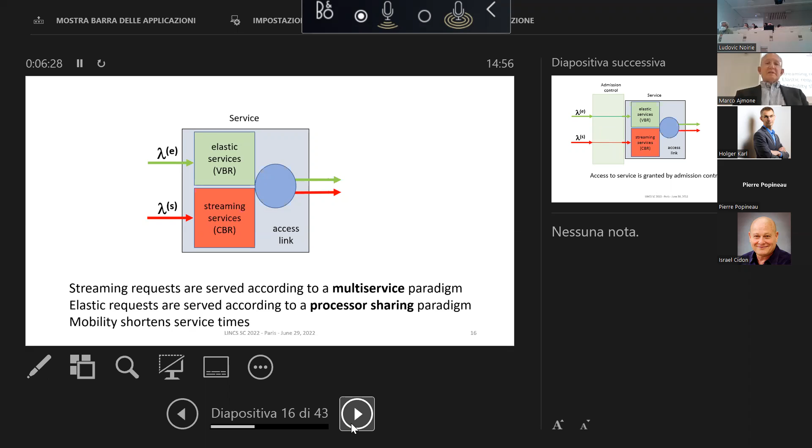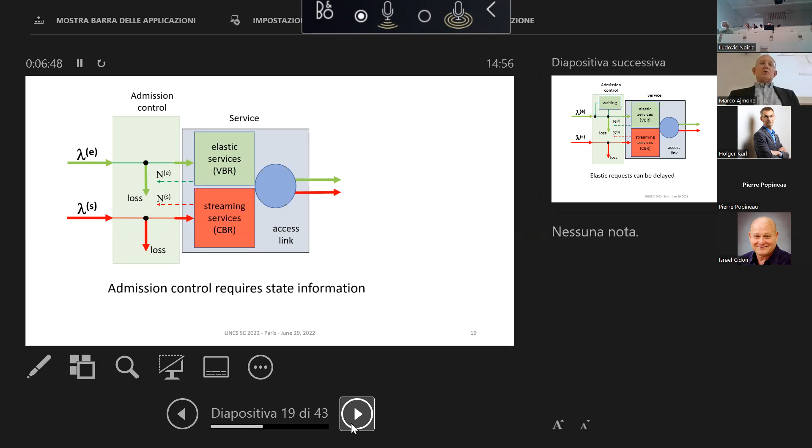Access to service is granted by admission control. Admission control may generate losses. Losses are dependent on what is the state of the system. So we have an admission control which is based on state information. For streaming, I cannot do anything except rejecting the request. For elastic, due to the fact that the service is indeed elastic, if I don't have resources, I can just delay the request. The service policy is Erlang B type for streaming. There is no queuing, and it is processor sharing for elastic, where queuing is induced by admission control.

Now, before I show you some results, let me mention that this paradigm has been investigated before in the literature. And you find in the literature several papers that state that this kind of model is essentially intractable because there is no product form between the behavior of streaming and elastic. The two types of services are dependent on each other. You cannot just solve for streaming and then apply a solution for elastic conditional on the distribution of streaming. Product form does not apply. There is a fairly complex interaction. And so in the literature, what you find are approximations and bounds. This is what exists in the literature.

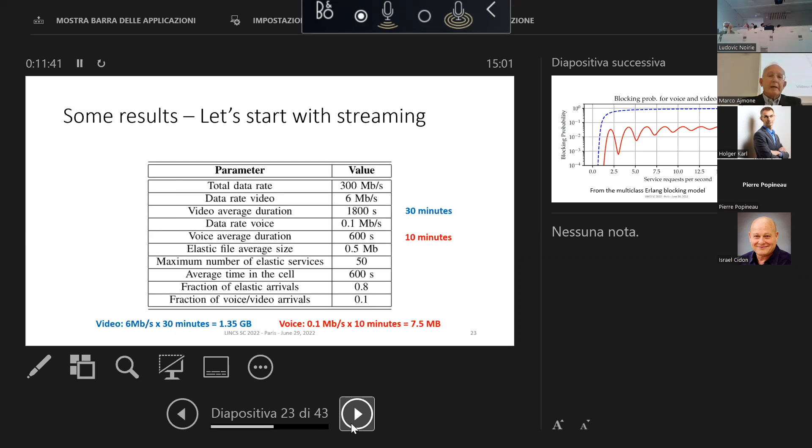Now, you solve for streaming, which is very, very easy. I mean, this is just a multi-class Erlang B formula. And what you get is strange. Actually, when they first came to me with these results, I said, come on, that's not possible. That's wrong. But this is what you get. And if you look at what happens for video, you see something which is very familiar.

So you see a monotonically increasing loss probability for growing request service. In the horizontal axis, we have the service request per second, and in the vertical axis, we have the blocking probability. What is unusual, or at least was surprising to me, was to see that the voice blocking probability is oscillating. How can it be oscillating like this?

And we spent some time trying to figure out why this happens. And this is probably one of the interesting things that we found out. This is happening because of the large difference in resource consumption that you have between video and audio. You see, these are the stationary probability of 46, 47, up to 50 video services. And what you see is that 50 simultaneous video services consume the entire base station bandwidth.

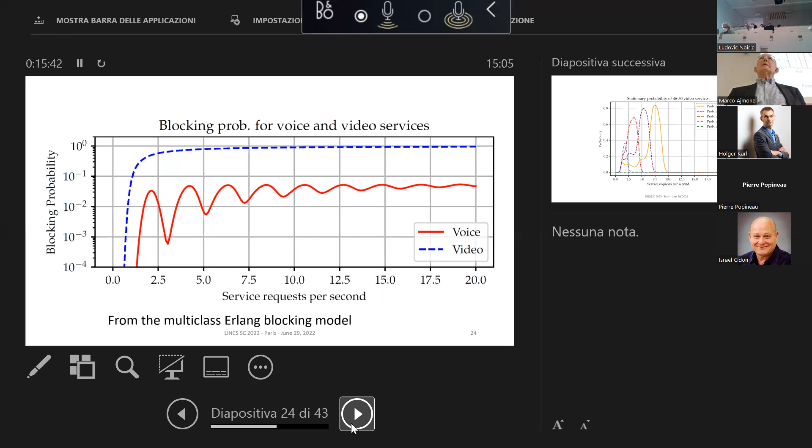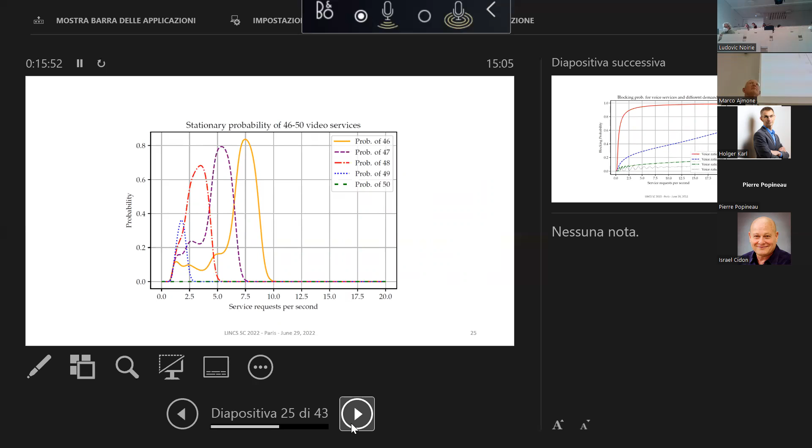And after trying whatever we could try, we finally couldn't escape trying to activate our brains and trying to figure out why this was happening. And these probabilities, I think, are explaining fairly well what is happening in your system. But as I said, up to here is just more or less of a curiosity.

The fact that this is generated by the difference between the resource requirement of audio and video is also explained here, because if you keep exactly the same overall occupation for one voice and one video call, and you're just dividing it differently between video and audio, what happens is that if you have a ratio 1 between the occupation, of course, the two curves are exactly the same.

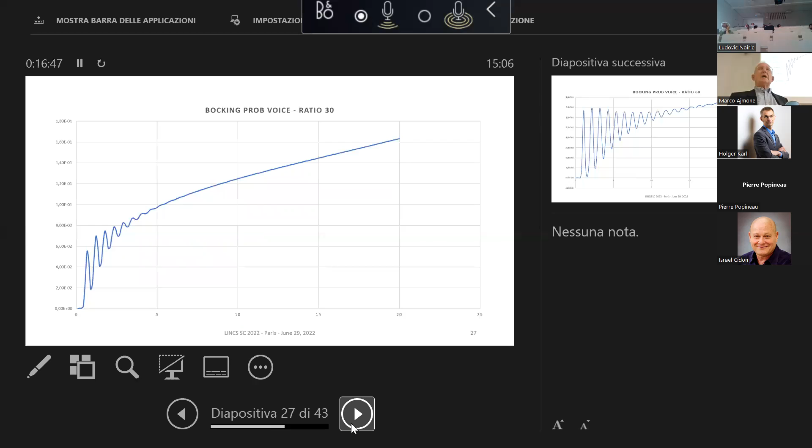If you have a ratio 10, you don't see anything. If you have a ratio 30 or 60, then you start seeing oscillations. This is what happens with ratio 30. This is what happens with ratio 60.

And here you understand why I was pointing out before that I am lowish on video and highish on voice, because I am not exaggerating the ratio. So this is something which is likely to happen in practice with the numbers that we are using today for video and audio.

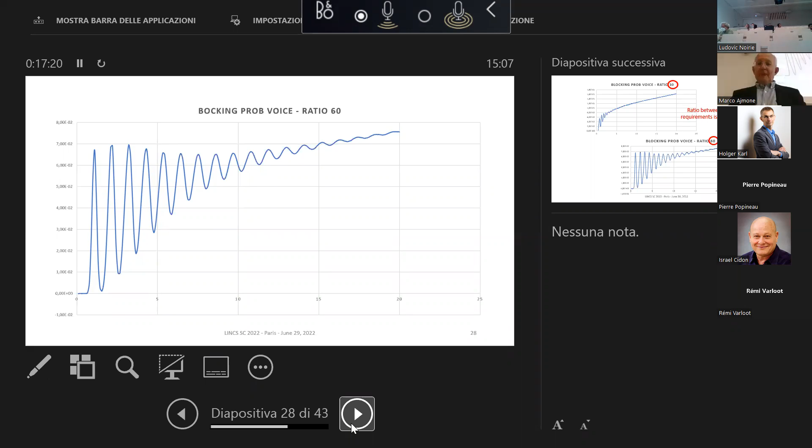And what happens is that if your admission control keeps constant the ratio between the elastic arrival rate and the base station capacity which is not used by streaming, then you get product form. This is just an application of a known result in queuing theory, where you have a combined modulation process and an underlying process which accesses the resources which are modulated by the modulating process.

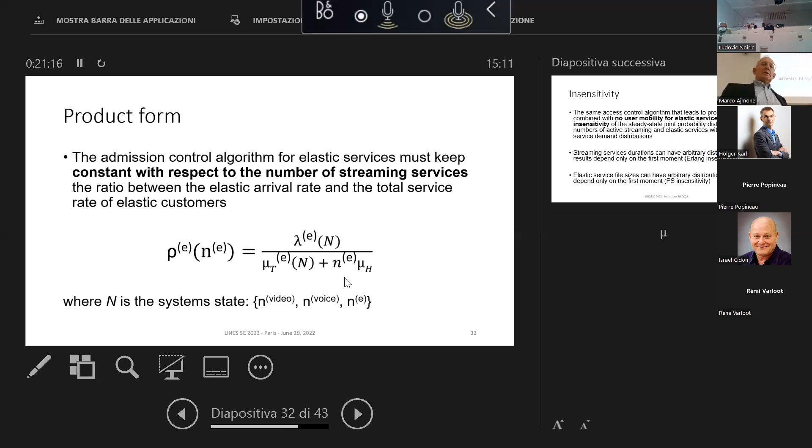Well, if you are in a mobile environment and you are making a phone call or watching a video for a fairly long time, you can expect to experience handovers from one cell to another and so on. If your elastic service is downloading a web page or sending a WhatsApp message, the typical elastic services that we are using on the internet today, these are fast. So neglecting mobility for this kind of services is not so critical. Which means that with the given admission control, you get both product form and insensitivity.

So at this point, let's add the elastic traffic. The elastic traffic, again, I have two orders of magnitude in the volume in terms of bytes of elastic traffic with respect to voice. And I already had the two orders of magnitude between voice and video. So there is a big difference. And what do I see? Well, I again see oscillations.

Here you have this curve in the inset, which is the blocking probability for video, which is the one we had before. This red curve here, which is the blocking probability for audio, the same curve as we saw before. This light blue curve, which is the blocking probability for elastic. Remember, I admit a maximum number of elastic services. This oscillates, and oscillates even more than the case of audio.

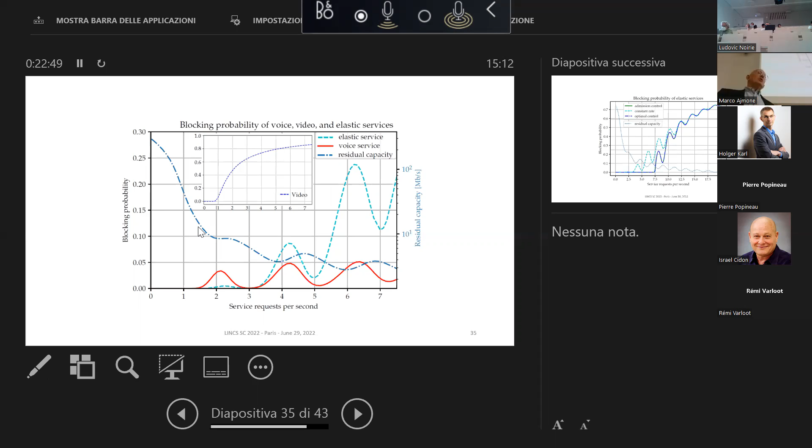And here you have the residual capacity. What I call residual capacity is the capacity that remains for elastic after I have allocated capacity to streaming, so to both video and audio. And you see that here everything is oscillating.

At this point, you might tell me, well, this is because you used this strange admission control. If you don't use that admission control, but simply behave normally and let the Poisson flow of elastic requests come in directly, you don't have all of this. And the answer is no, not true, because here I have three admission controls. One is the admission control that gives product form. Another one is the constant rate.

And you see that the constant rate, which is this light blue dashed curve, oscillates even more and even earlier than with my admission control. And then I have an optimal control. The optimal control is actually overlapping the admission control that I showed you. And the optimal control is an admission control that has all information about what has happened up to now and what is happening in the future.

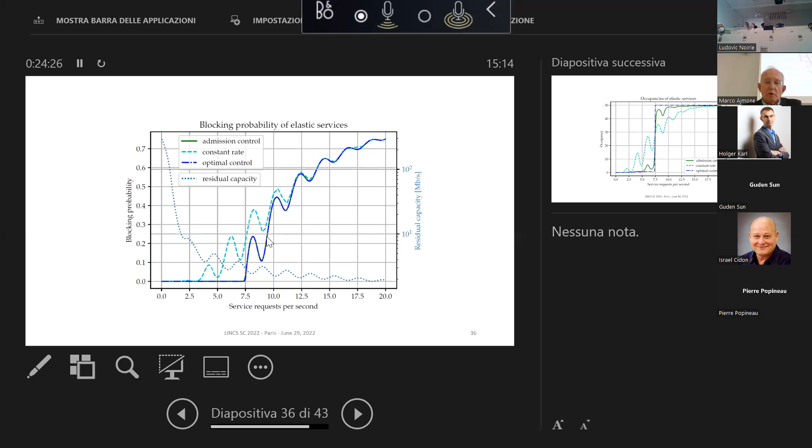So the optimal control is not implementable, is really optimal, but is giving similar performance to the admission control that gives product form. Not exactly the same. Here you see the difference in terms of resource occupancy between the optimal admission control and the constant rate and the admission control that gives product form.

Of course, the optimal control is better than anything, because the optimal control is doing the best that is possible up to 7.5. 7.5 is the value of arrival rates that gives 100% utilization for the combination of the different types of services. So 7.5 is the point where elastic services consume all of the remaining bandwidth after the allocation to streaming. And of course, at that point, you jump to the maximum number of possible elastic services.

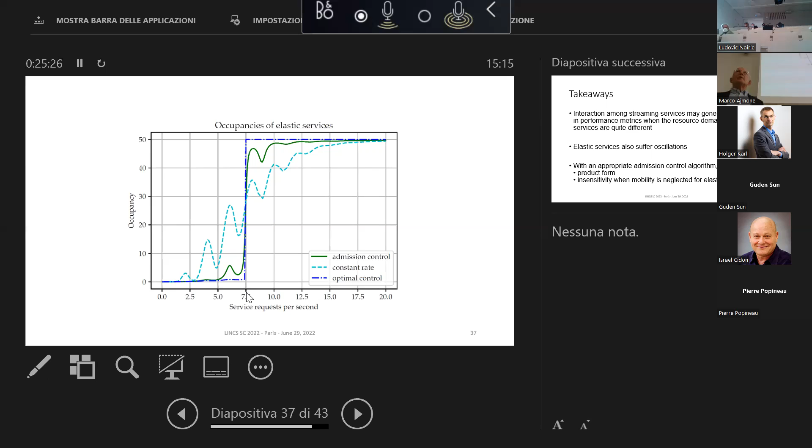So that is more or less the story, and this is just a summary. Provided you have these big differences in volume of megabytes used by video, audio, and elastic, you see these oscillations, both on the smaller class of streaming and on elastic. The interesting part is that with an appropriate admission control, you can get both product form and insensitivity. And that's the end of the story.

I might perhaps add that one thing that is normally asked by the audience is, well, yes, but in reality, streaming is not fixed data rate. If you are watching a video, you clearly see on your screen that the video jumps in quality, because depending on how much resources you have available in your base station, in your access link, your quality jumps up and down,

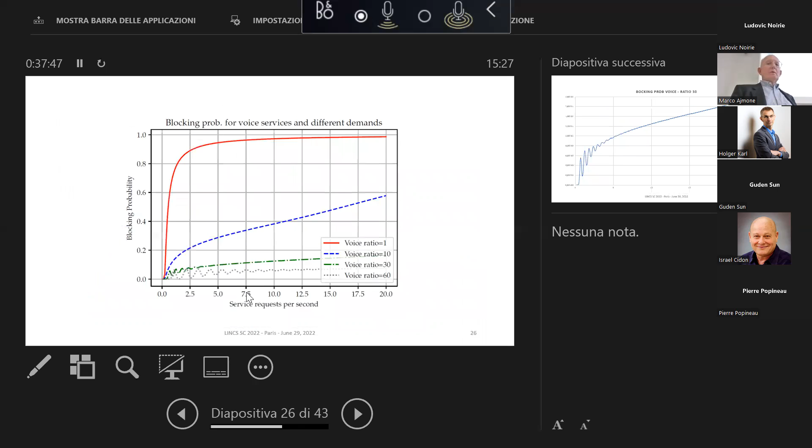So this is just a very simplistic example, but by introducing some intelligence in the edge of the network, you may admit more traffic, because you have information about the relevance of each of the individual flows, right? And this will change maybe the results. The fact that once you admitted the flow, the way they are multiplexed will depend on the type of flow. And the edge will have this intelligence.

Yes, but this is more or less what I'm doing here with that weight that I'm keeping outside. And keep in mind that once the elastic service is admitted, its data rate can go to 0, because if the base station data rate is consumed by the streaming, then you essentially are pausing the elastic. But I'm saying the contrary. To pause the streaming. Because I have a buffer for the streaming in the destination. This is what is done today.

And this is available in some devices already. So by doing so, we are changing the dynamics. And it seems that you will be able to admit more traffic. Yes, probably. And I don't know if this is affecting or not the oscillations you are describing. That I really don't know.

And the second question I would have is, where do you see this admission control to be implemented for the elastic traffic? In which part of the network? Because it's not really the case today, right, that we implement admission control for this type of traffic. You may have admission control for the streaming traffic in the service platform itself, but for the elastic traffic, how do you see it?